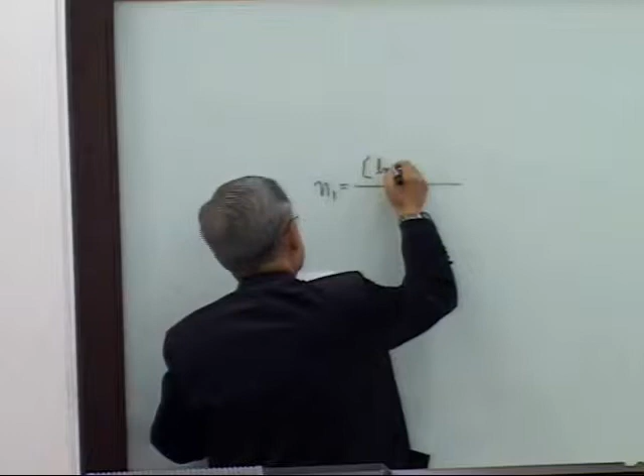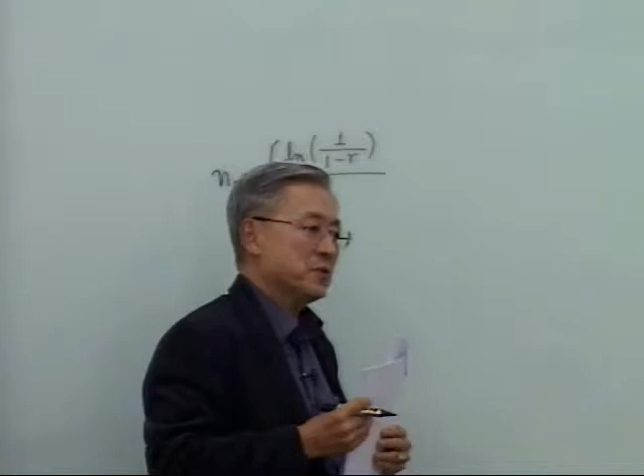What's R here? What's R there? Hyun, what's R? If you don't answer, I'll point to you. I remember all your names now - Chuil, yeah, Seongtae, right. R is reliability, but I'd rather say required reliability, which is not an assigned random variable, a specific random variable, or some people call it the design reliability, same as required reliability. That's what we know, and this is what is in my note.

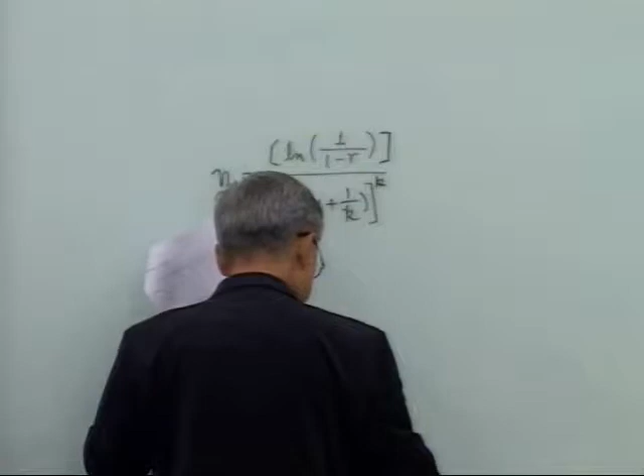Gamma function. This is the equation set I gave you. This is not what Higyu gave me, but what I recorrected, and that was wrong.

So what Jungan recalculates, would you please check? Jungan, correct? Yeah. So just to check back, when you put the power, then it's a little bit confusing.

And also, additionally, the book is also wrong. But you know, Isaac, this is really the first edition, so I'm going to send an email to Isaac, tell him this is what my students discovered, and we have to really help him correct it.

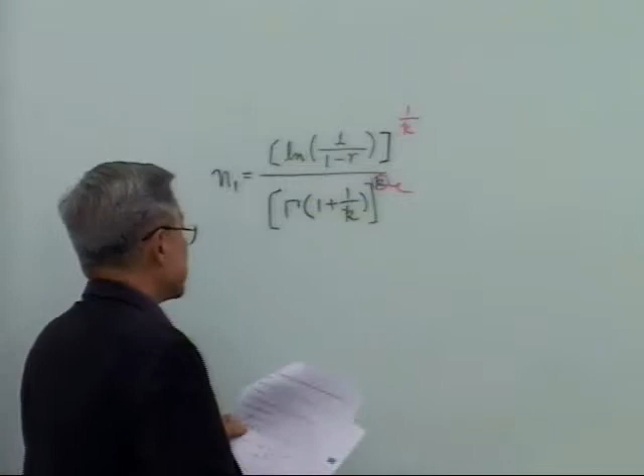Also, if you look at page 7, this is page 717, and on page 716, there is a variance equation. See that equation - Jungan this morning reported to me that this has to be squared there, meaning the whole thing squared. Square has to be there, but please check, would you? Variance has to be C sigma s squared.

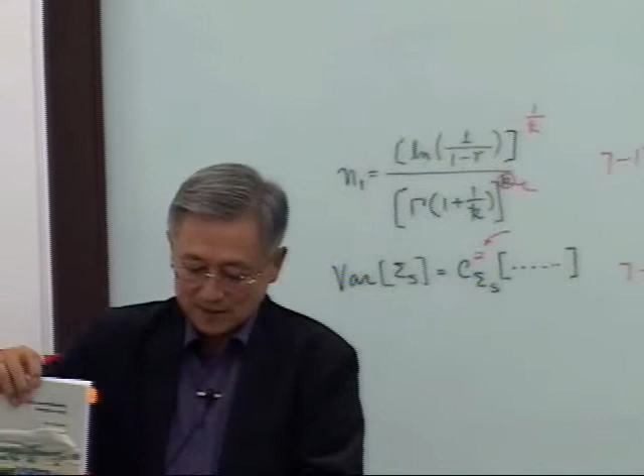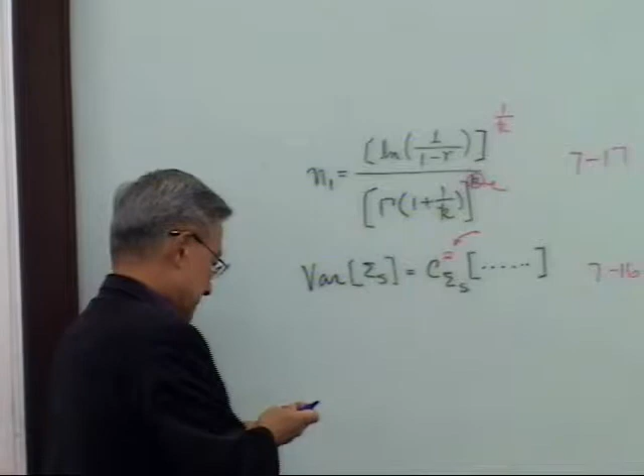If you don't come back to recorrect, I'll accept it, and I'll check back, of course. Okay. Higyu, would you check back once again?

Okay, the cases we looked through last week were actual stress. Actual stress is random, and strength or yield stress are deterministic. So that's what we studied with a few different models.

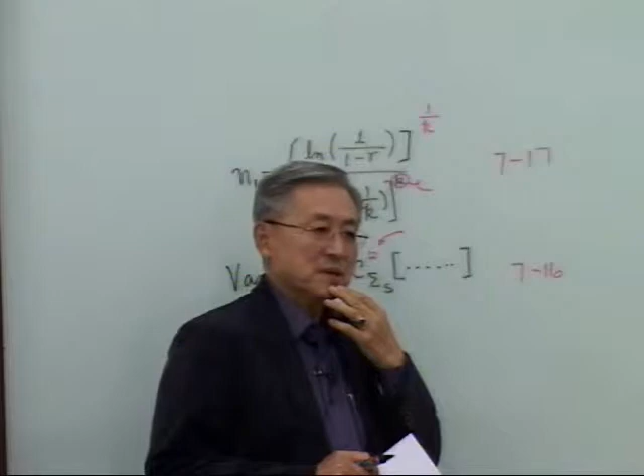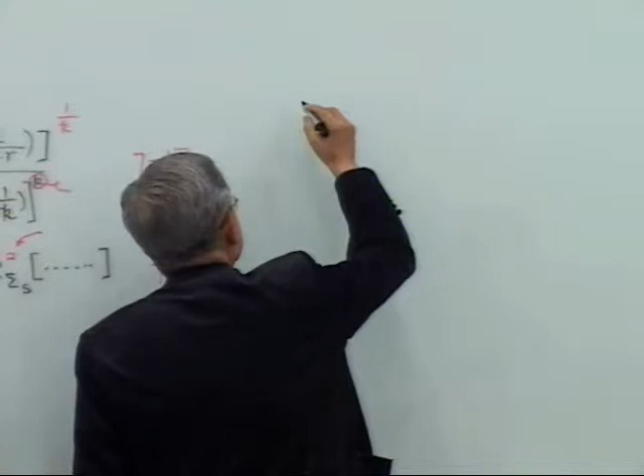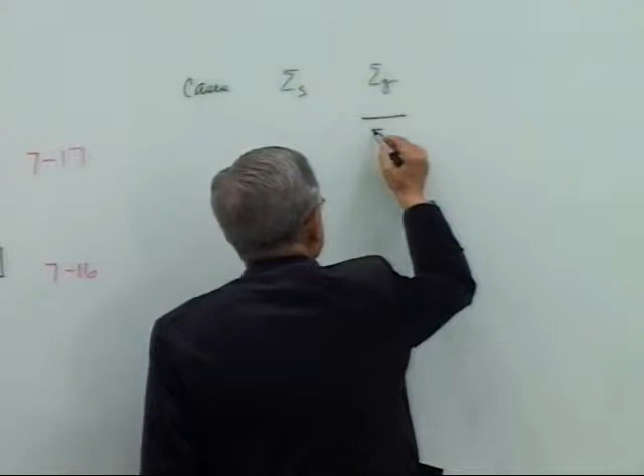Okay, this week we're gonna do four. We're gonna do for... so we have cases, and sigma s, sigma y is what we usually deal with, and we are going to do some cases.

The yield stress is the random one. That's what we have to do, right, Julie? And we're gonna have this - the loading over the actual stress, or actual loading, is deterministic. And in this case, there are a few different cases we're gonna do. But in addition, I'll let you do one more case, which is slightly confusing.

Among the models, which model do you think you might have to pay attention to? Normal, log normal, Weibull, exponential, and Rayleigh? I feel log normal is a little bit trickier, because in log normal, the natural log of x follows what model? Probability - the normal distribution model, if x follows the log normal. That's a little bit more thinking.

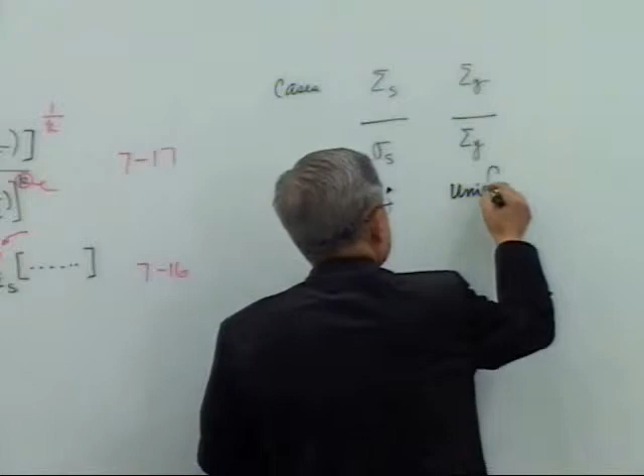So what I'm gonna do here, first, this doesn't change - it's deterministic. So the easiest model to understand the philosophy is a uniform probability model, that we're gonna do. And the second, we're gonna do exponential.

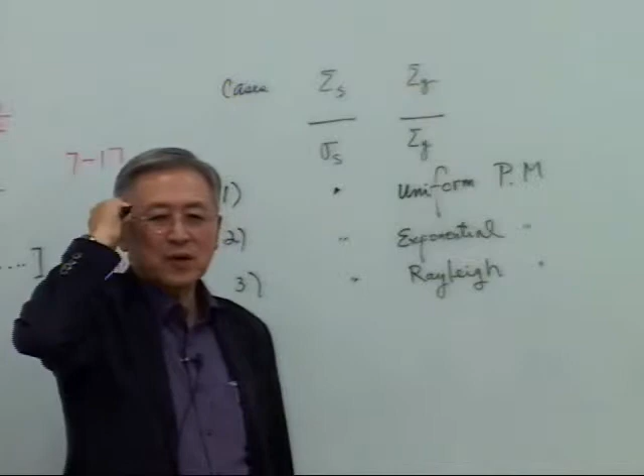Probability model number 3 has more engineering cases, Rayleigh probability model. Rayleigh is a pretty well-known scholar historically, covering the acoustics area—he wrote books and all that. So in those days, one scholar covered many different fields.

Number 4, normal distribution. Number 5, log normal distribution. I'm going to cover number 4.

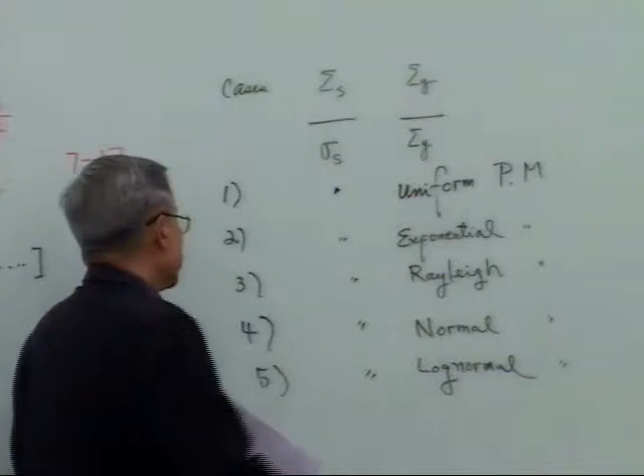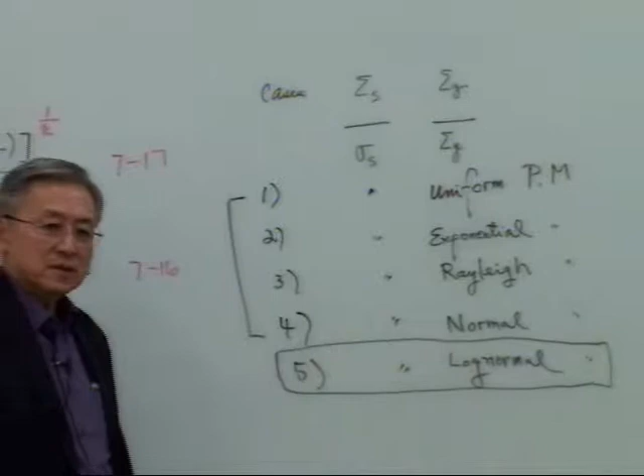Then you do the last one, would you? Yes, you do that. You don't have to turn it in, because I'm going to put that in as part of the exam problem. Then you can really say, oh, I have done this before. So this is log normal, you do it, because some of you screwed up.

When you do the homework for the case, the previous case, actual stress is log normal, and this yield stress is deterministic. So a little bit trickier, but not that really tricky.

That's what we're gonna do, okay? And as you look at the approach, it's really almost identical to the cases we studied last week, but the definition of reliability is the probability such that actual stress is less than the yield stress.

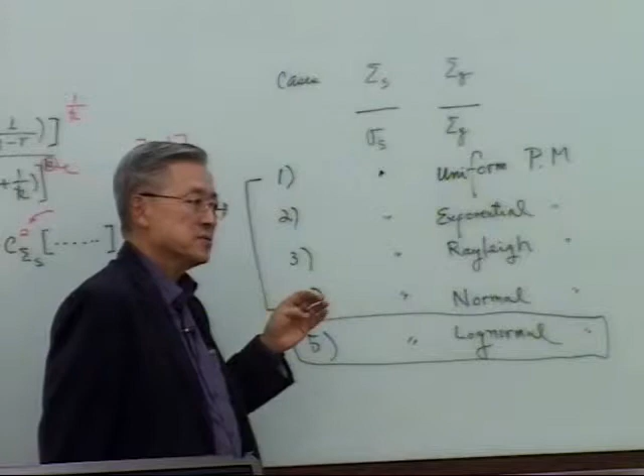In that definition, which part you must treat as random—that's the difference, okay? And then for the random part, in this case it's yield stress, so we have to get the cumulative probability distribution function to get the reliability expression.

That's about all for this. For next week, it's the generalized case, random to random. Then from after that, it's going to be all random to random, and we're going to get into the really failure surface concept.

Toward the end of next week, I'm going to give you two files, a rather thick file, at least 50 to 60 pages, but you can print it here, right? In black and white—some pages you can print in color. It's Professor Du's couple of chapters, that's what we're going to do.

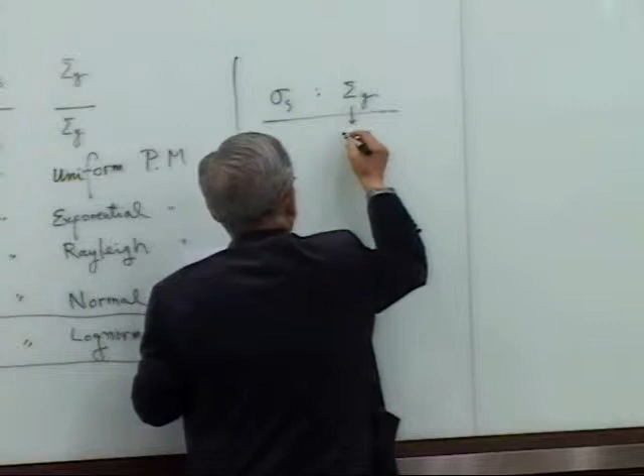And here we're going to do the first case. The first case is sigma s and sigma y, and for this we're going to assume uniform distribution.

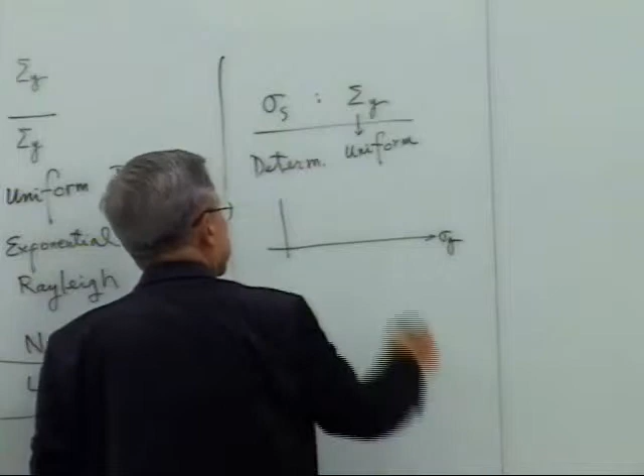Deterministic—this is deterministic. So for the uniform distribution, as we did with sigma y, this is f of sigma y, similar to the case shown last week.

The sigma y—this is the lower bound, this is the upper bound—uniform distribution. And here, the value is 1 over sigma y upper minus sigma y lower.

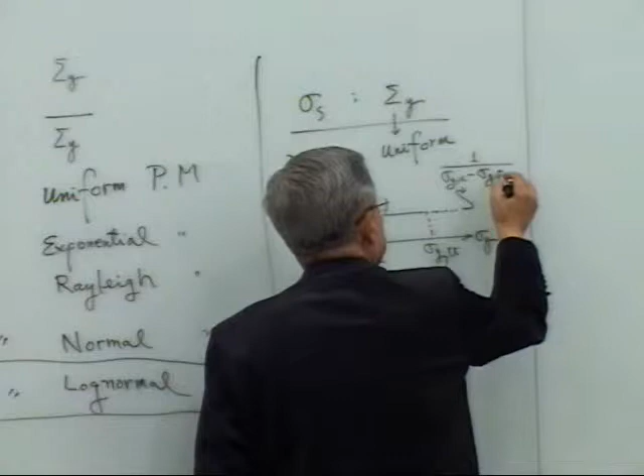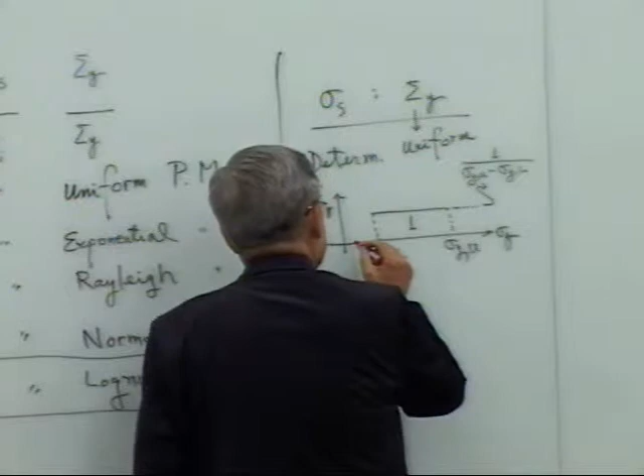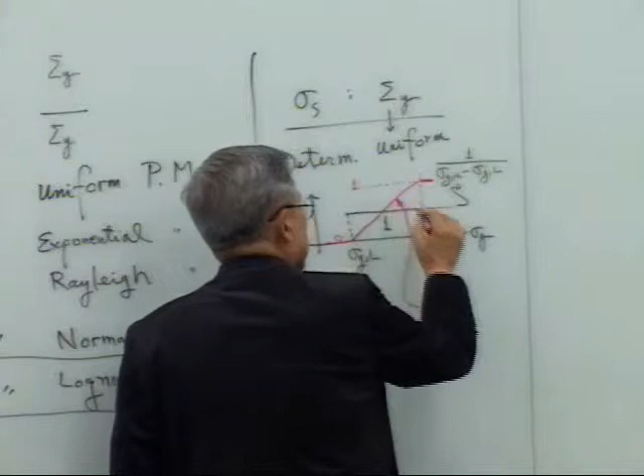This is, of course, the 0. So here, the equation of this straight line between lower bound and upper bound is, of course, sigma y minus sigma y lower, divided by sigma y upper minus sigma y lower.

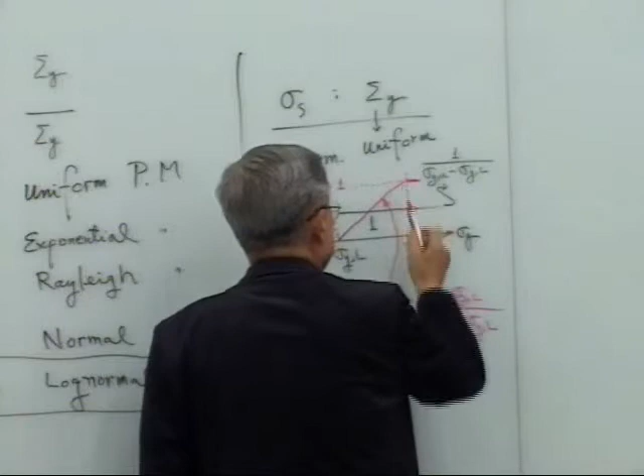When sigma y is equal to 0, what happens? Let's see—when sigma y is at the lower bound, same thing minus same thing is 0. When this is at the upper bound, it cancels out up and down, then this becomes 1. That's what the result would be.

So this is the summation of the density functions, right? So now you're all set to solve the problem.

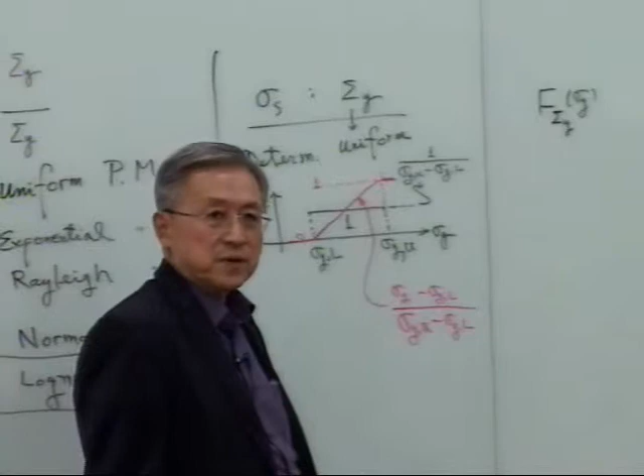So let's write this one. We are dealing here—our target is to get the reliability, or the probability of survival, or the probability of failure, which are complements of each other. So of course, the density function you can get from here, which is 1 over sigma y upper minus sigma y lower. That's clear.

We need this—why do we need this? That's the probability model. Sigma s has no probability model. Then you have to associate this information to the reliability or probability of survival, things like that. So to do that, this is a probability.

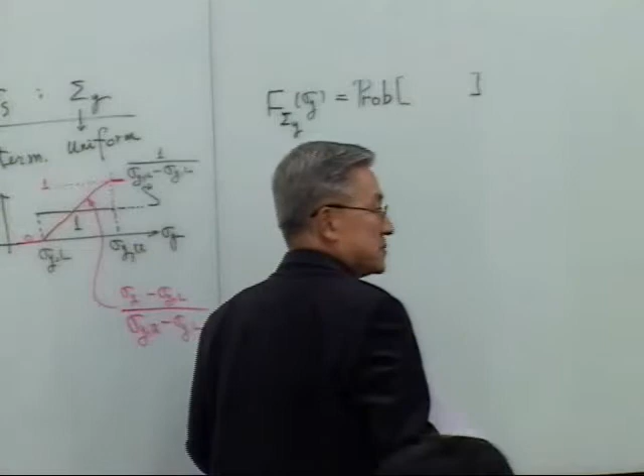So, what's the expression in the parentheses? Look at me. It's open book, that's why—50 chance to win. What's this?

I'll wait. And the two parameters you have to work with, right?

For the probability of failure or probability of survival. Actually, Isaac used actual stress, but it doesn't have to be actual stress. It can be like a loading. Some books use P and R. I just mixed that in the previous note. If you look at the loading, the R, the strengths.

So S is deterministic, right? Deterministic, and this is sigma Y. So for the reliability, strength has to be higher than sigma S. For the reliability, I'm going to delete the equal sign, as Kiwan mentioned, that's very consistent. When you deal with probability of failure surface, that failure surface is part of the failure region. For the safe region, you don't put an equal sign. It depends on where you put it.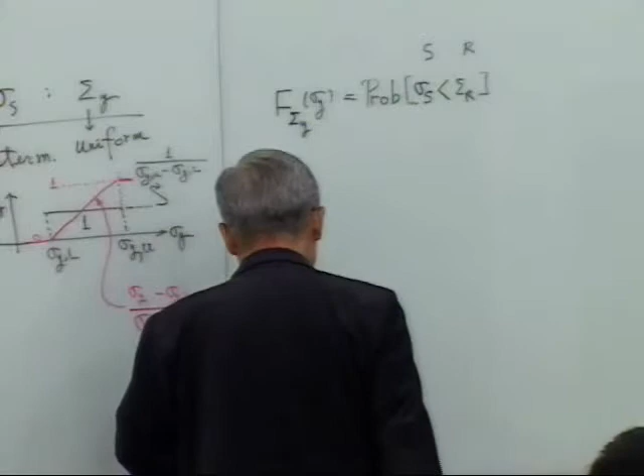So this is... oh, this is... what do I define here? What do I define here? Hey, Monday morning, 10 o'clock. Is this correct expression? Say no.

But this expression is what? This expression, that's a reliability. I mixed two different things in my thought, because I was paying attention to Yun-Suk, that's why I screwed up. I'm not accusing you, Yun-Suk. I love you.

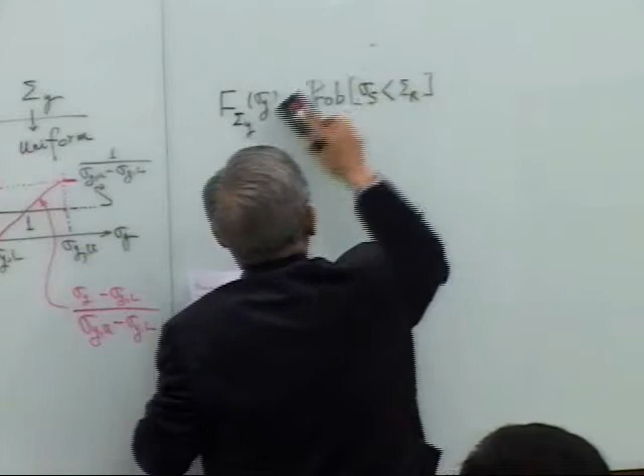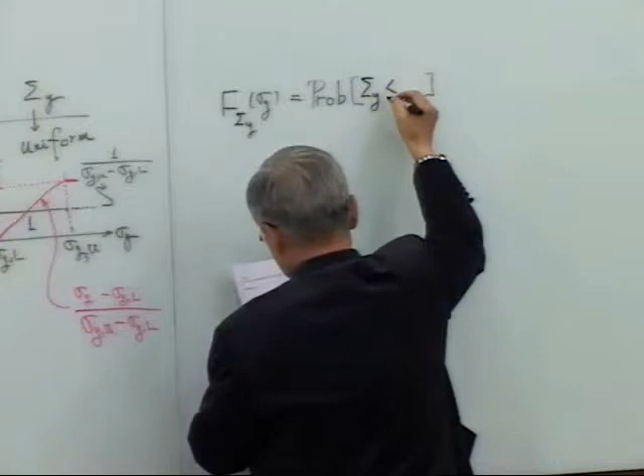So what do you have to do? This is the cumulative probability distribution function for the yield stress or strength, right? So to do that... sorry, excuse for Monday morning, but that's not true, that's not right. So sigma y is less than or equal to sigma y, that's correct.

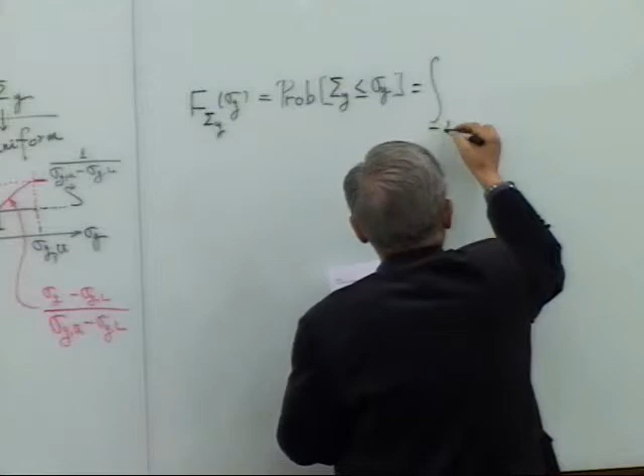Cumulative probability distribution function, of course, which is nothing but the summation, mathematically from minus infinity to sigma y, of f sigma s x dx. This is really what notation you use, it doesn't matter, that's just the integration parameter. Then this is equal to, starting from here up to this region is 0. From here to here is that equation. Beyond the upper limit it's simply 1.

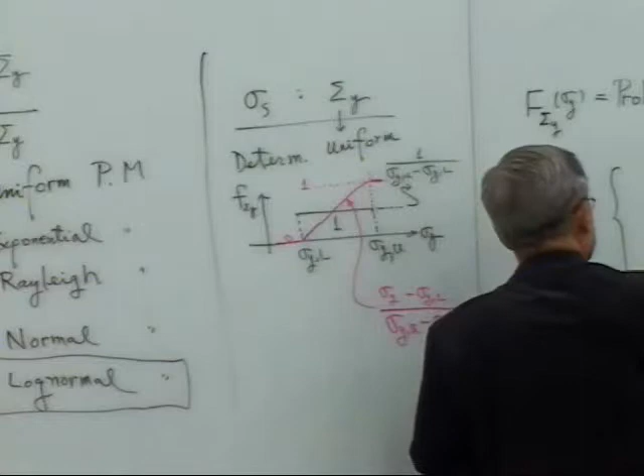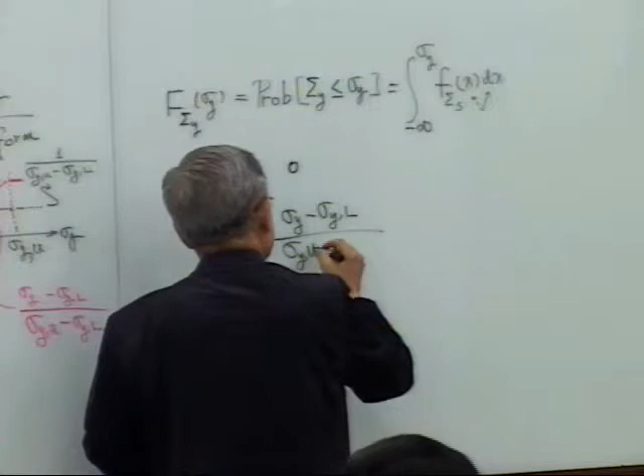0 and 1. Between is sigma y, this equation, minus sigma L, sigma y upper minus sigma y lower. This region is between sigma y L, sigma y, sigma y U, and this is sigma y, oops, I'm sorry. This guy is 0 below, sigma y is less than sigma y L, we have to put an equal sign someplace. This one is sigma y larger than... Just identify this red color, the region.

And now you have a probability model, which is nothing but the uniform or rectangular probability model. And now the whole job is to express R, which is equal to probability of survival. Sometimes you use that, or PS, same thing, no difference. This is equal to the one I erased, probability such that sigma S is less than, not equal to, sigma y.

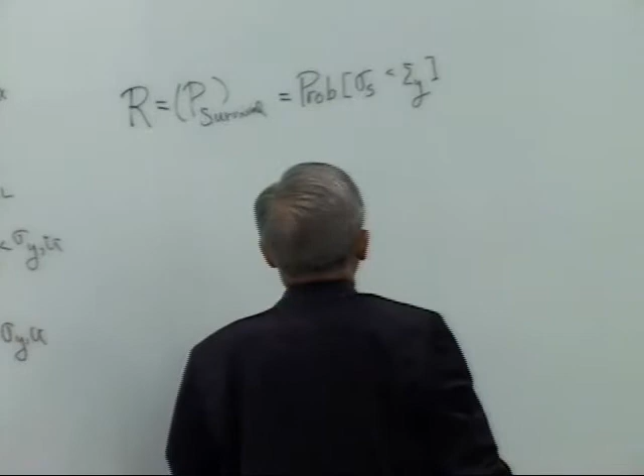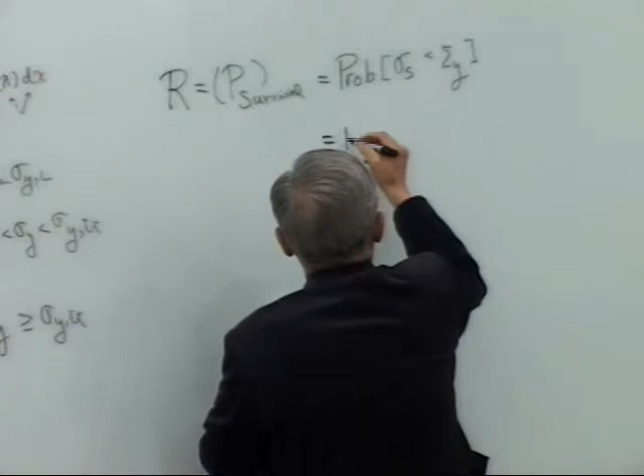You can use these expressions here from there. Then what we're going to do is probability, which is the reliability, is 1 minus probability of failure. Surely Monday morning, I had a great sleep.

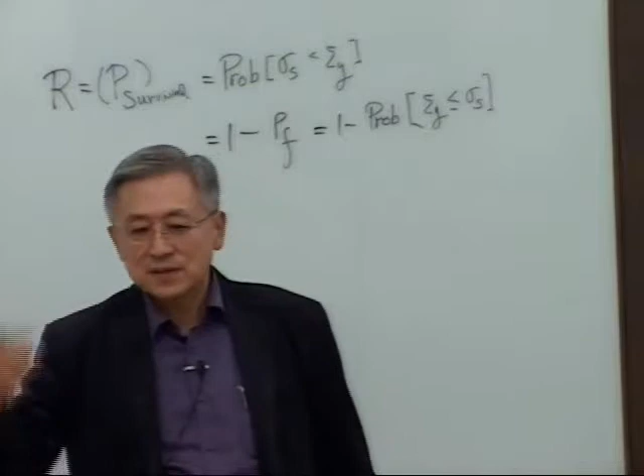PF, probability of the failure, right? Simple. Then reliability is 1 minus probability that sigma y is less than or equal to sigma S. Strength is less than. The way you can think of it is, okay, failure: strength is less than the load, strength is less than the actual.

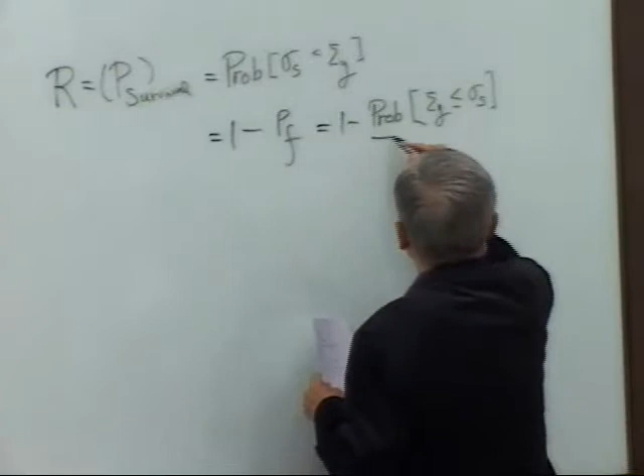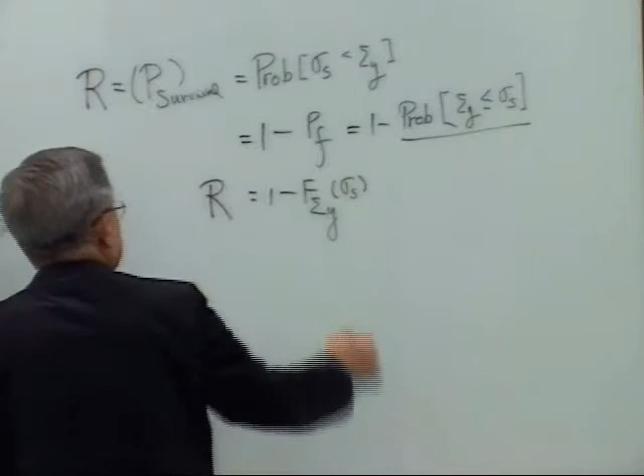So over here, we have, this is equal to 1 minus F sigma yield for sigma S. So simply this is R is 1 minus F sigma Y. 1 minus this guy, 1 minus 0 is 1. 1 minus this guy is the second region. 1 minus 1 equals 0. So 1, something, 0 for the reliability, right?

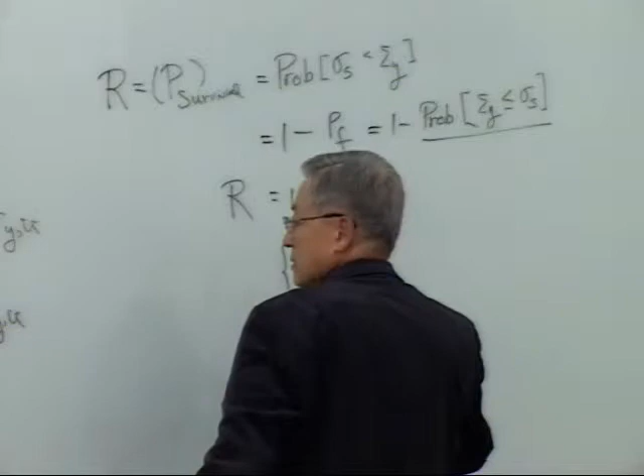Question? Yes, I understand, yeah. The last one, for the reliability, comes using sigma S in there, but for the cumulative probability model, we're using sigma Y.

I don't find... okay, let me. You have a question. Let's resolve it, it's best to do in the class. This, you have a problem?

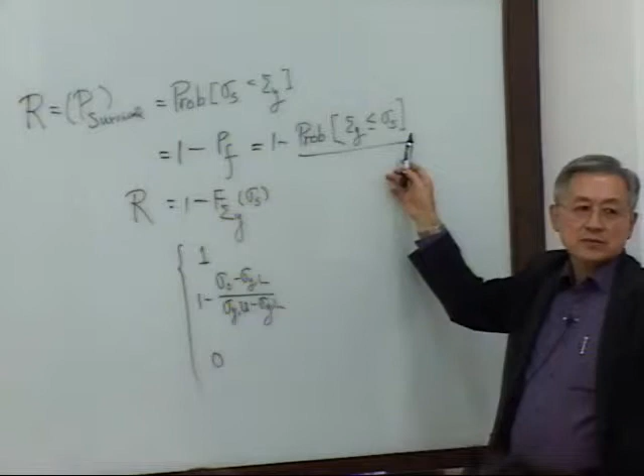Next, okay. 1 minus this is the probability of failure. So 1 minus, this yield is less than the actual, correct? So it's 1 minus here. So then now this is y, this is that. Probability yield is less than this guy. This happens: sigma y, you have to change it to whatever is in here, which is sigma s.

You see, you had, this is deterministic, right? Nothing to confuse. That portion is a little bit confusing, but that's a specific value of sigma y there. You can put, this is the yield stress model.

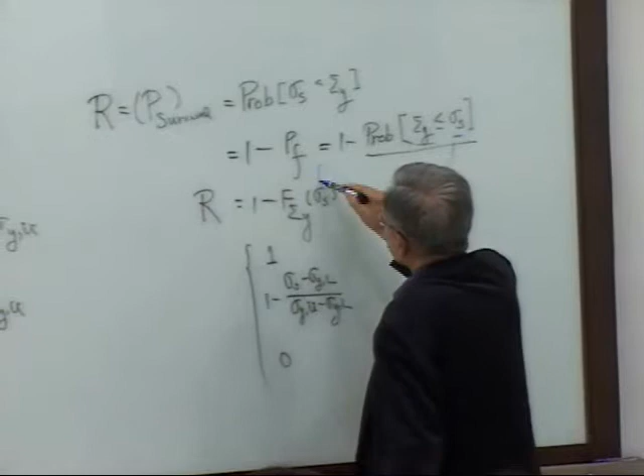So this means here is a probability, random variable sigma y is less than or equal to the specific value of sigma y, right? So then sigma, if you put this guy as sigma s, you have to put the sigma s in the yield stress model.

Yeah, I'm glad you asked a question, I was going to point out. Question was immediately, why is this sigma s rather than sigma y? Yeah.

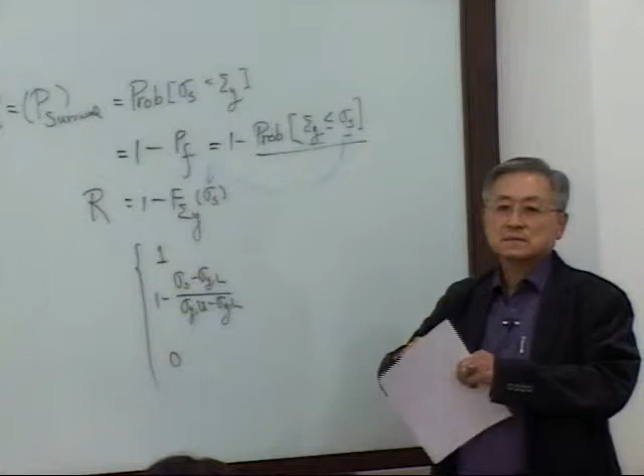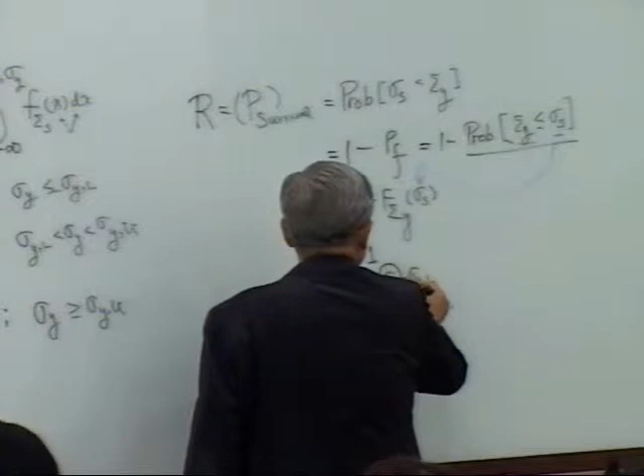Kyung-suk, clear? Say clear, nothing to confuse. It's easily... okay, so now all I did was this model is identical to this model, but in this case also sigma y I have to replace with sigma s. In the process, this is the reliability model. This is simply the yield stress model.

Got it? Nothing to confuse. So here, this identical: YL, this is sigma YL, sigma Y, sigma YU, and sigma Y is greater than sigma YU. Up to here, question? Smile.

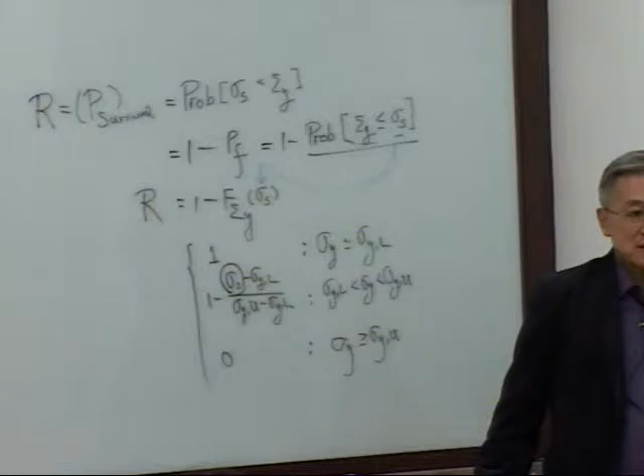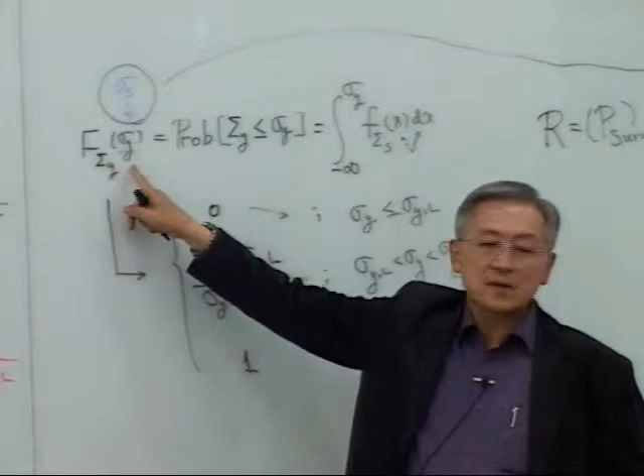This is... what I did was this, in this model, all I'm going back out here. To get this, I have to put this guy, sigma y. This is simply, think of this, this is a deterministic value, a specific value. Model is yield. You're comparing in the model what happened if yield stress, the actual stress approached the yield stress.

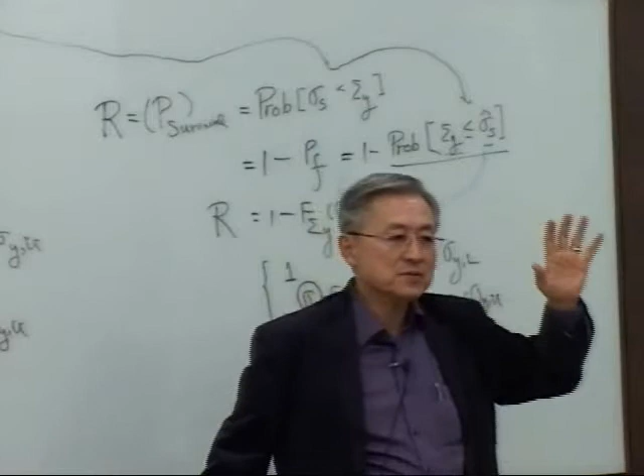That's what we are comparing there, to define the probability of failure here. This is the probability of failure. You have to compare this guy to that guy. If yield stress is less than the actual stress, failure occurs. Then you are dealing with what probability? What's the chance?

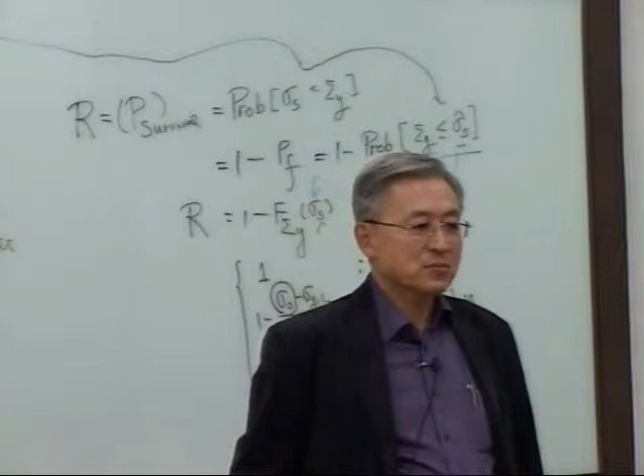Okay? Hey, open your heart, then accept it. Yes, so easy? Very easy. Joel? No problem? Hey, come on, yes, no problem. That's the answer. Yonghyun? No problem. How was the baby over the weekend? Good? Good, right? Yeah, that's good. Okay.

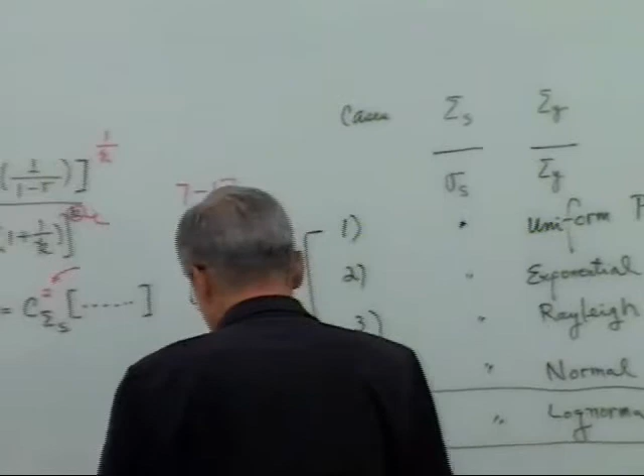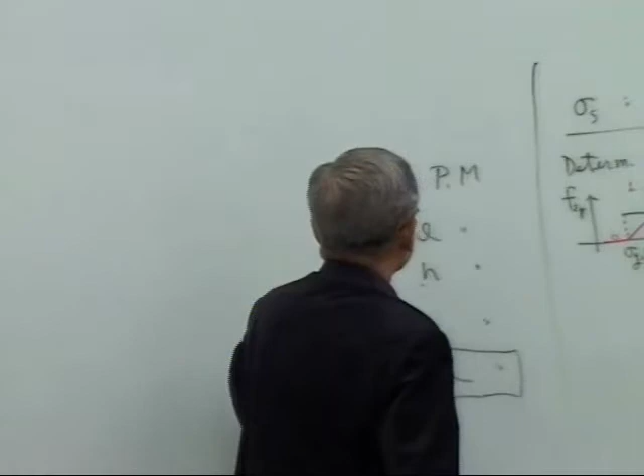So, any additional question? Arlene, problem? So, a couple of parameters for the uniform distribution function. Couple of parameters, we have done it before, last week.

So, E of Sigma y. What's E of sigma s? What's E of sigma s? What's the expected value of sigma s? Louder. Sigma s, why? This is deterministic. So this is sigma s.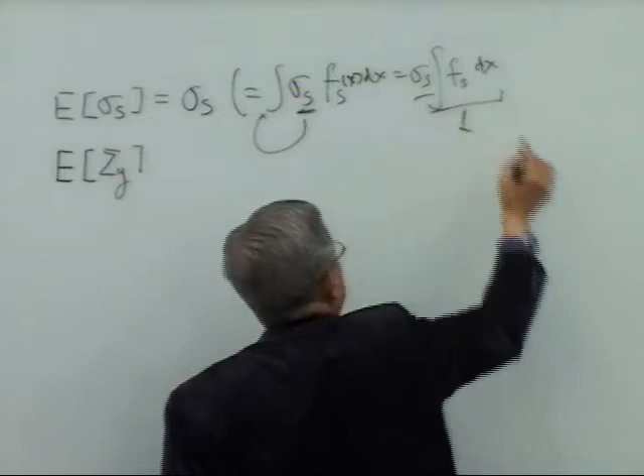Naturally, say that's a stupid question. Stupid question. This is a constant. This is 1, no distribution, simply the addition is 1. I'm sorry, but I would rather say, if this is x, this is dx, sigma s is a constant, put it out, so which is sigma s times summation of fs dx, this is equal to 1, back to sigma s. So this is 1.

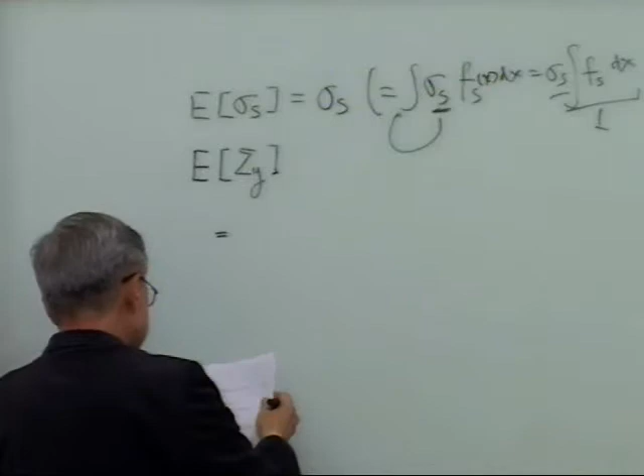But this guy, you have to actually do the calculation, first moment. So the limit is sigma yL, sigma yU. Below is 0, above the result is 0. So sigma f, sigma y, sigma d sigma. You know this guy, that guy is nothing but this guy.

So, which is equal to sigma times, over here is 1 over sigma yU minus sigma yL. And the sigma, you have the sigma yL, sigma y. Even such a simple model, I would have put that in the exam, because it's good to remove any possible confusion. Then if you do that, then you have half of, plus sigma, this is u.

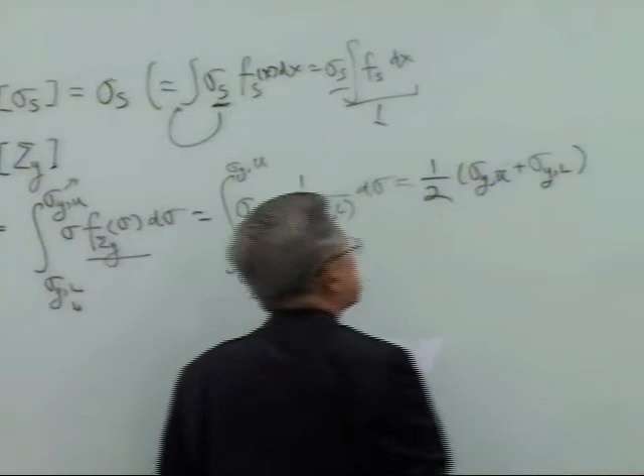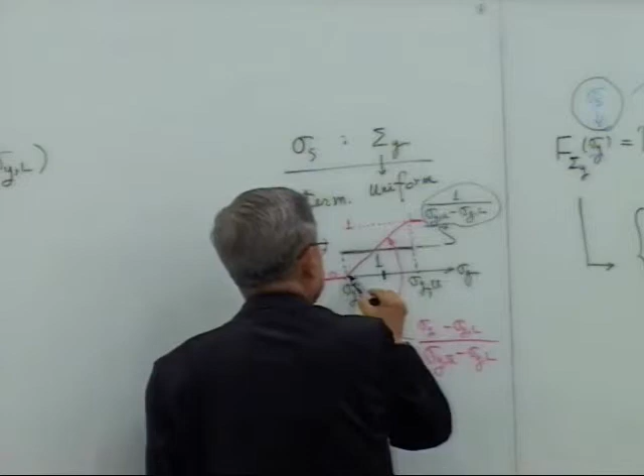Graphically speaking, you're looking into this guy, from here to here. What's the average? The mean is half of this guy plus that guy, for the uniform distribution. That's it.

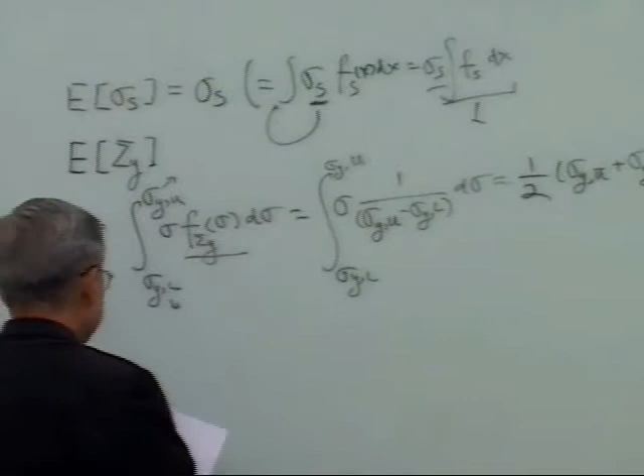Then you can compute the variance of sigma y. The variance is the standard deviation squared, in terms of the integration. It's a second moment, it's a variance, so which is sigma y minus the mean. Mean, sometimes I use this guy, right? Same thing. This is a dispersion about the mean.

And F sigma, S sigma y, d sigma y. Nothing to confuse here. This is yield strength, that's why I put that in here. I put that in here, which is an integration parameter simply. So I can use this, no problem at all. Who cares about the notation of the integration parameter, right?

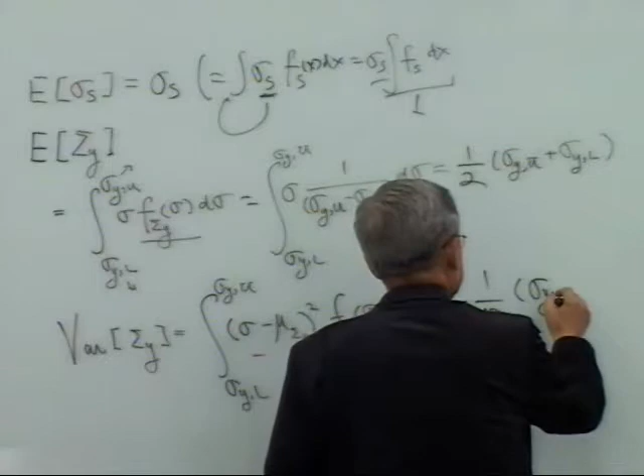So if you do that calculation, this is the second moment, okay? So one-twelfth, sigma y upper minus sigma y lower, cubed — I'm sorry, squared, because this is the second moment.

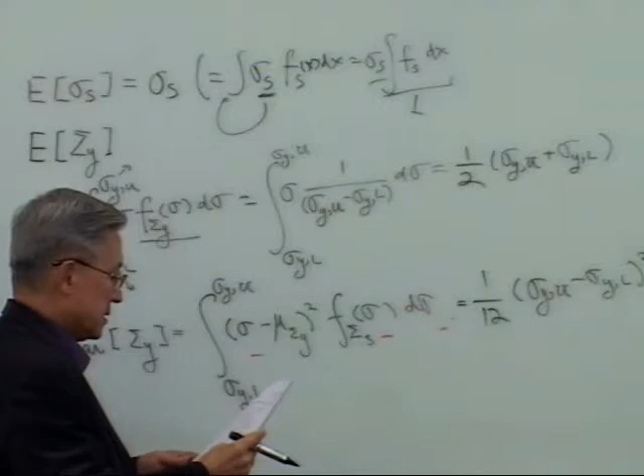Using these two equations, the reliability model can be expressed — it's all in the book, in the lecture notes. So you can express this guy from this guy, and sigma y upper and sigma y lower re-expressed as a function of the mean of sigma y and the variance or standard deviation of sigma y.

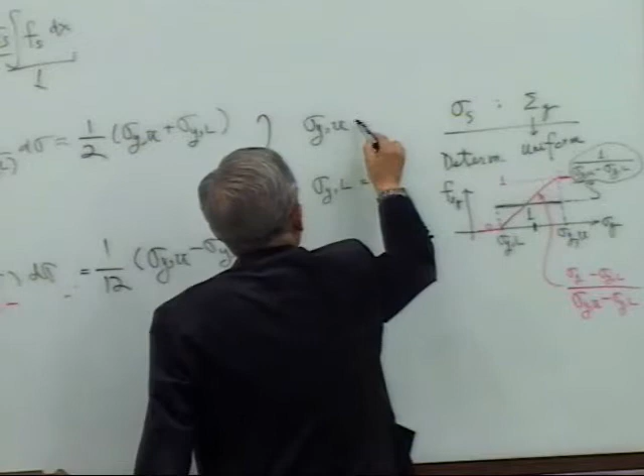Then express this as a function of the mu sigma s, and also the square root of the variance of yield stress. Then you can simplify and all that. That simplifies and expresses the reliability as a function of the mean yield stress and the variance or standard deviation of the yield stress. That's what the vendor's spec has to show, how good our product is.

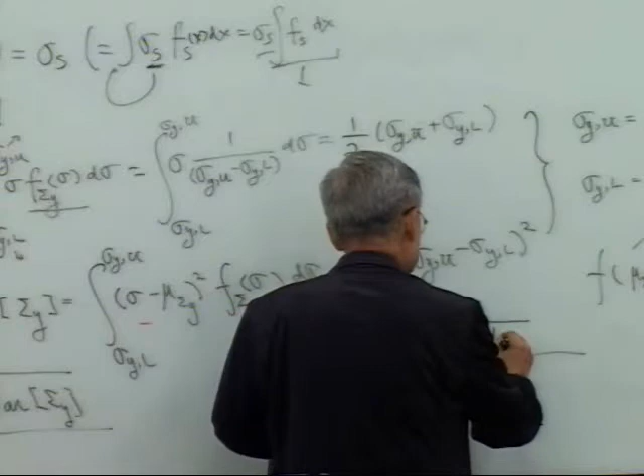Okay, so if you look at this, this is mu sigma s, sigma y plus the square root of 3 times the variance of y, minus sigma s, over 2 times the square root of 3 times the variance of sigma y.

Or you can express it by introducing N1. What's N1? The central safety factor, which is the ratio of the mean of yield over the mean of the required stress, which happens to be constant in this case. So if you do that, then N1 equals 1 plus the square root of 3 times nu sigma y, minus 1, over 2. It's a closed-form solution.

That's the beauty, that's the beauty. This is nu. So over here, this guy is equal... oops.

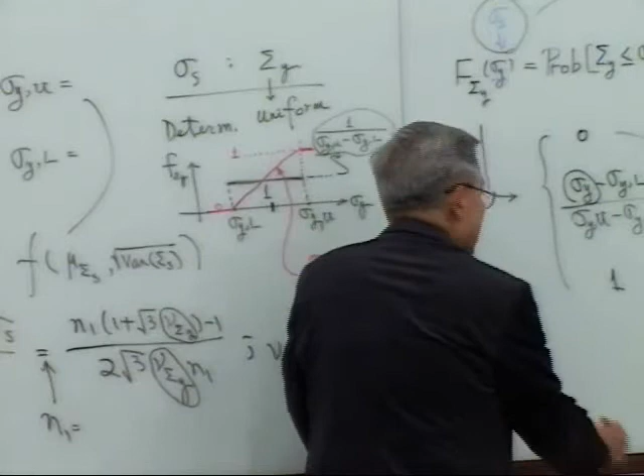Then you better abandon conducting any probabilistic analysis, because you better buy the new product from the vendors. Otherwise you're wasting money. If you use that material to build a ship — what do you call it, FPSO? So terrible, better not doing it. So this is a good measure, coefficient of variation, for strength. If this guy is nearly 1, abandon the ship — not gonna work. If this is no good, don't do it.

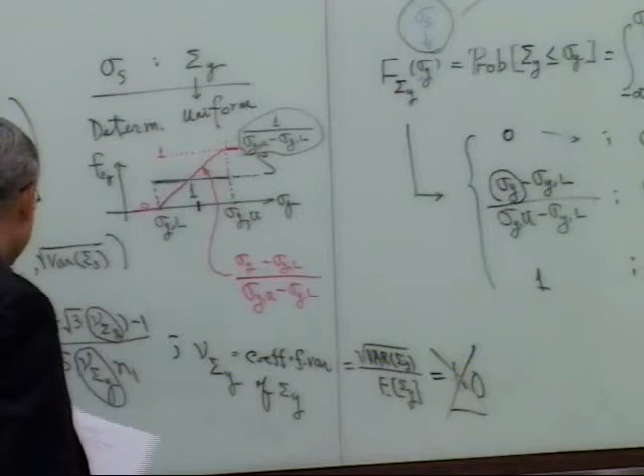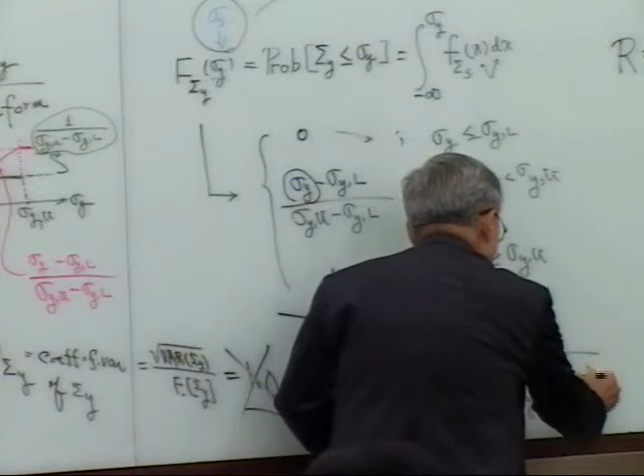So this is an expression for R, and then N1, the central safety factor, which is 1 plus the square root of 3 times nu sigma y, the coefficient of variation, over 1 minus 2R. R is the design reliability or required reliability — design reliability, good name. Say I want the reliability of this system to be 0.99999.

Then this goes to 0.999. If the coefficient of variation is large, 50% and even higher, this N1 central safety factor has to be very high, stupidly high. You can't design that.

Okay, I'll stop here, then we'll continue to finish up this family of problems this Wednesday. Then you'll have a chance to review the lectures up to Wednesday. Then we'll continue the week after this week. Okay, I'll stop right here.